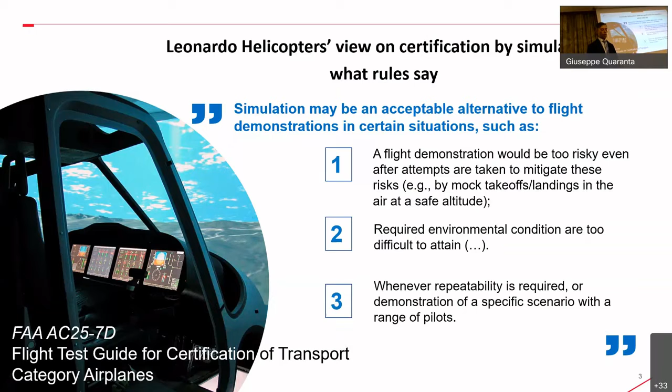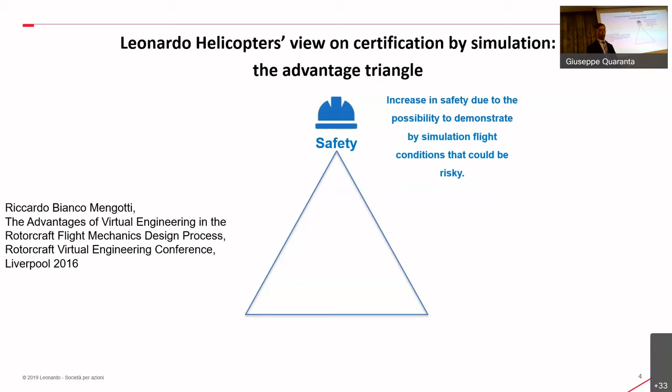From a company point of view, we think there are three main advantages of simulation, which I'll present through this graphical representation, the advantage triangle, first presented at an engineering conference we had in Liverpool. In that paper, the first advantage is safety, which couples with what's already shown by the rules—we can substitute some risky scenarios with simulation.

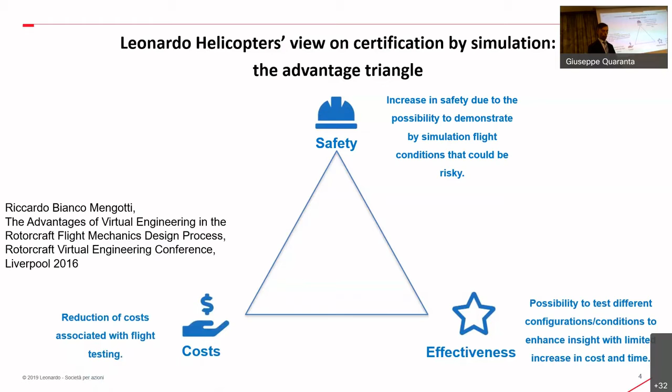The second advantage is effectiveness, so we can get more understanding of what we're simulating through changing conditions and configurations more than we can do in flight. The third is cost, once the model cost has been taken into account.

For sure, this doesn't come easy. All these benefits have a cost, and the cost is model and simulator development. The literature doesn't provide quantitative limits or ideas on how good the model needs to be.

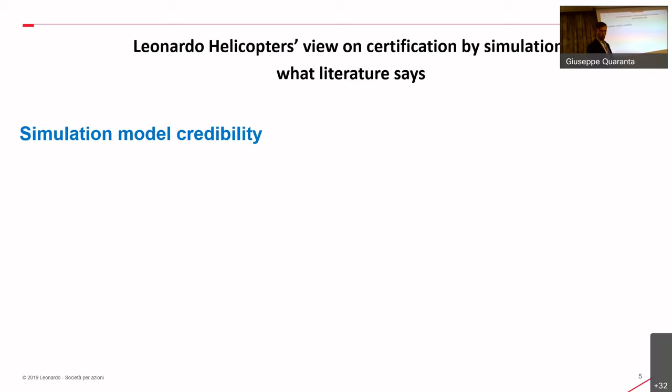So it's more a qualitative description of the model reliability. For example, one particular reference tells us that the model should be at least good enough for me to say I'm comfortable using it, to take a decision and send people to flight with my model. I think it's a good rule, but it's a qualitative one.

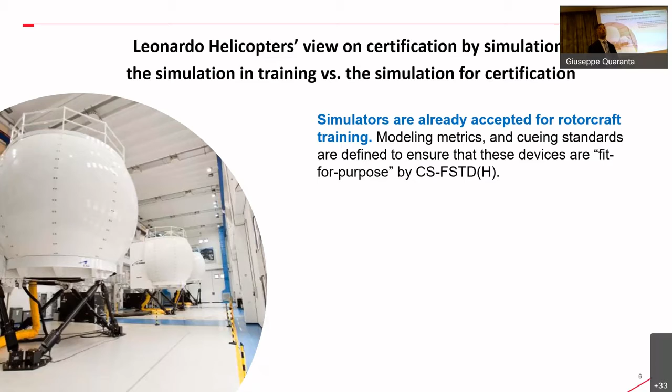We know that simulation is used very much in training. The use is slightly different than a certification model. Typically, training can rely on a set of already-defined rules, the FSTD, that provides specific tests, a specific bunch of tests, and rules that the model should respect—boundaries on which the model should stay to reproduce the flight test data.

But the certification simulator is a bit different because it comes earlier than the training device, and the need for extrapolation capabilities is stronger for the certification simulator. This is because we need to use it especially to extrapolate, to test conditions that have not been tested before and for which we don't have a predefined benchmark provided by flight testing.

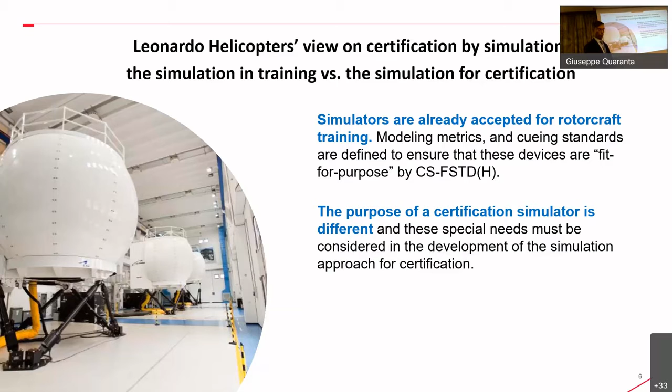Simulation for certification, from our point of view, to be useful—not for training—should give strong importance to physical behavior. So if we want to extrapolate, we should be able to keep the physical meaning of all the parameters that we are even tuning to match the flight test data.

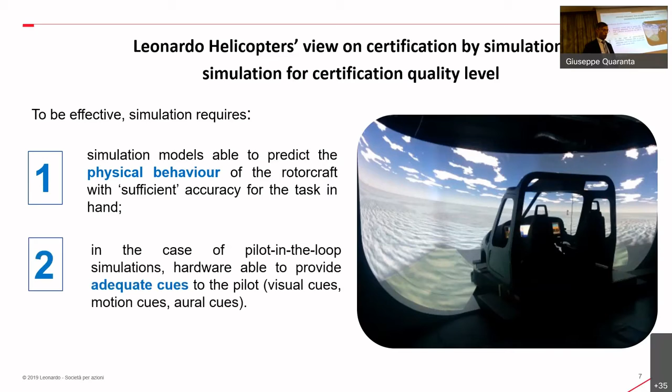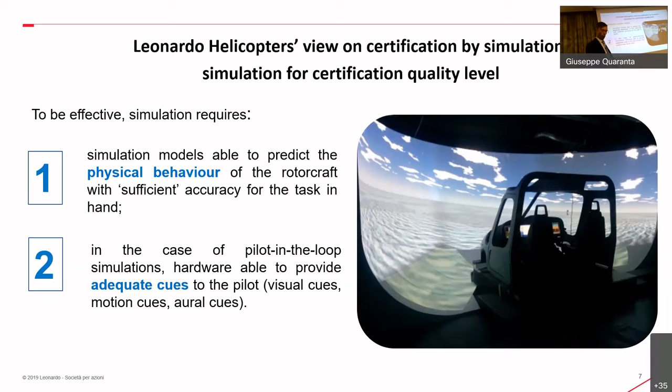Second, if we move to the simulator, we should provide adequate cues to the pilot. From our experience, for example with power-off landing, the model might be good, but the pilot might complain about the feasibility of the maneuver due to lack of cueing from the hardware more than from the reliability of the model or the model quality.

Our challenging view is to try to cut down current certification flights, or flights used to support certification, by half in 10 years.

Moving to the second section, our experience so far. I'll present two examples. One is the power-off landing of the 189, in which the means of compliance was simulation. This is basically a full example of certification by simulation, in which flight testing was used to support simulation. The other one I will explain the details of later.

Civil aircraft have a requirement to land safely even if two engines have a failure. The paragraphs explaining these requirements are those listed here: 75 and 79 concern landing after an engine loss, while 143 is about controllability in landing.

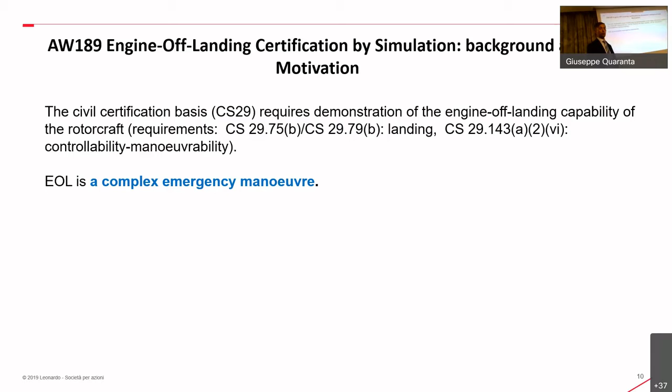Then, close to the ground at a certain height, about 200 feet, the pilot performs a cyclic flare by pulling cyclic, gaining angle of attack and lift, and reducing both the vertical and horizontal speed of the helicopter. Then finalize the landing by leveling off and compensating the loss of lift produced by angle of attack by increasing the collective.

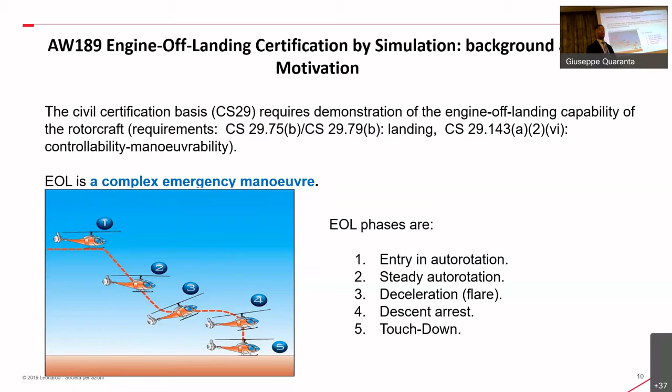And then touchdown. This is a very complex maneuver because the pilots need to quickly, in an emergency situation, assess the distance from the ground and respect the constraints imposed by the flight manual on this maneuver.

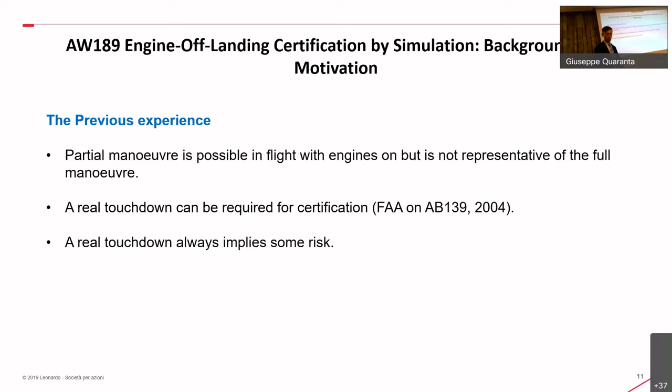In previous experience, we typically performed a partial validation in flight through just the cyclic flare. With the 139, we were asked by the American certification agency to perform a real touchdown. We did that on the 139, but a real touchdown always carries some risk. So in 2014, with the 189, we decided to go with a simulated maneuver, with support from the European certification agency.

I'll give a brief introduction to the helicopter we used for this activity: the 8 to 9 ton helicopter, the 189, used for offshore scenarios, VIP transport, and search and rescue.

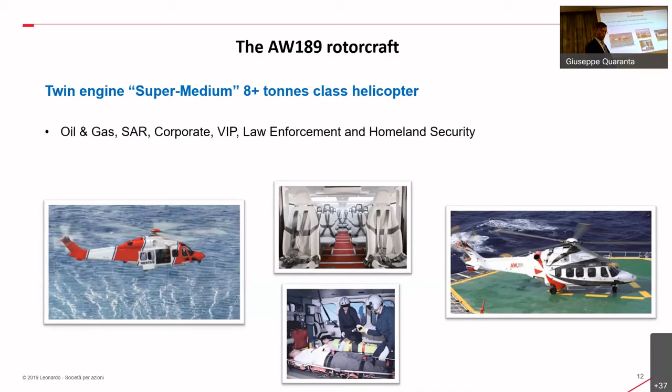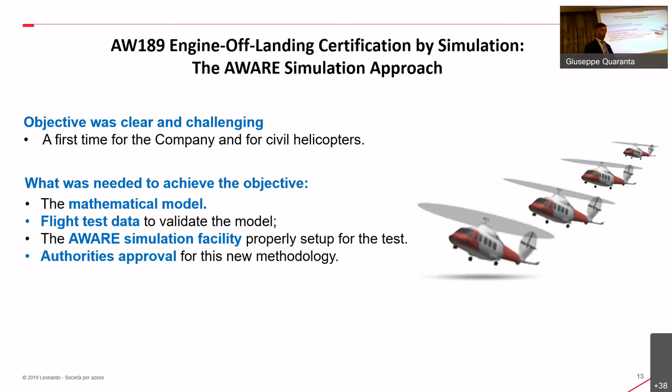I'll go into some details on the simulation approach we used. It was the first time for us to perform this kind of maneuver. What we needed was the simulator facility, the mathematical model compared against flight data, at least for the portion where flight data were available, and the green light from the certification authority.

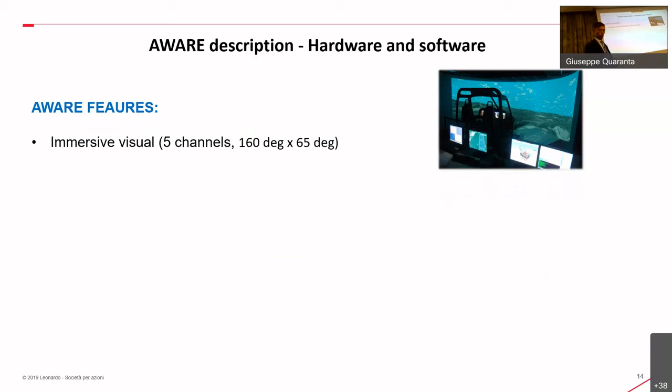We performed this in our fixed base simulator, shown in the picture on the right. It features a 139 cabin and emulated displays. The portions that can be tuned or changed according to the aircraft we want to represent are basically the model and the displays: a Simulink model for the FCS and a FLIGHTLAB model for the aircraft characteristics.

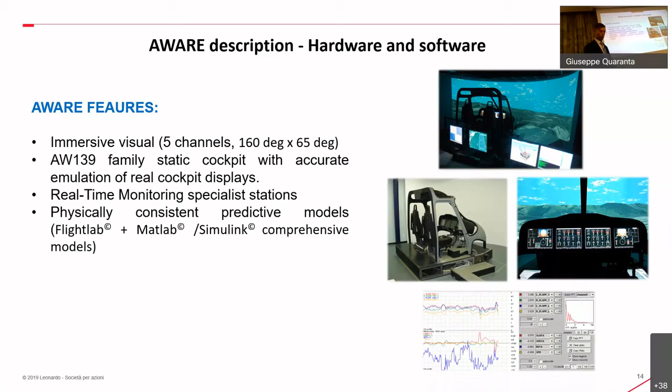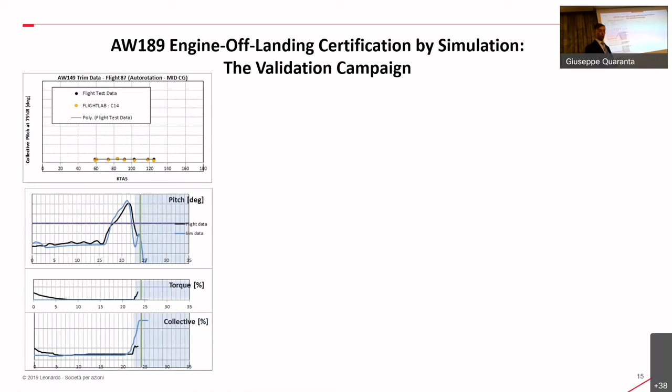To provide input to the simulation, we performed some flight activities. Partially the maneuver was performed in flight: the cyclic flare with one engine idle was done in flight. But the cyclic flare is not representative for the portion where the pilot pulls the collective, because the engine comes in to provide power. So that last portion cannot be reproduced in flight, and that was done in simulation.

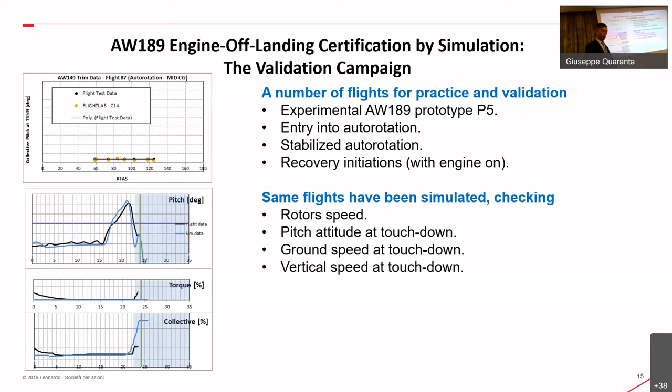The main comment was that, as I told before, not only the model needs to be taken care of, but also the simulator. The pilot perceived a higher workload and difficulty in perceiving the ground altitude, the offset from the ground, which made it more difficult for him to optimize and time correctly the pull of the collective and the moment to perform the flare. That's why I put emphasis on the hardware that provides the cues to the pilot, because sometimes lack of cueing is perceived as a lack in modeling, but the pilot sees the overall result and cannot split the two.

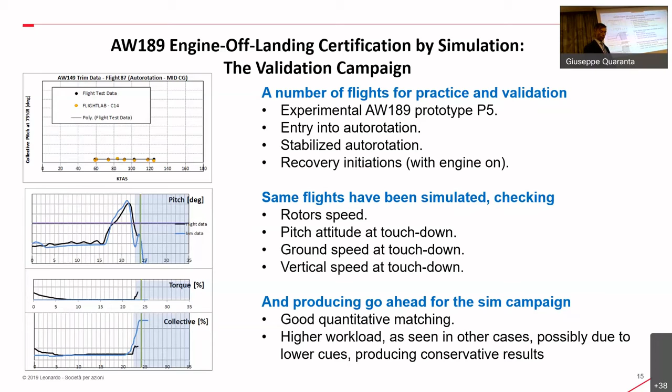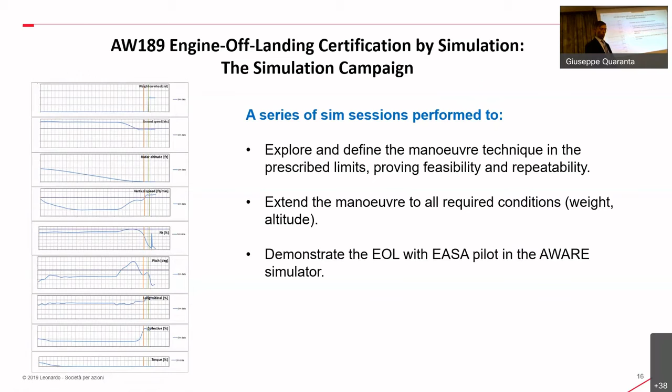With that model, and after the okay from EASA who came to test the performance of the model in our simulator, we performed the maneuver in the simulator, and prepared the flight test manual section using the results coming from the simulator test campaign and the experience of the flight test department.

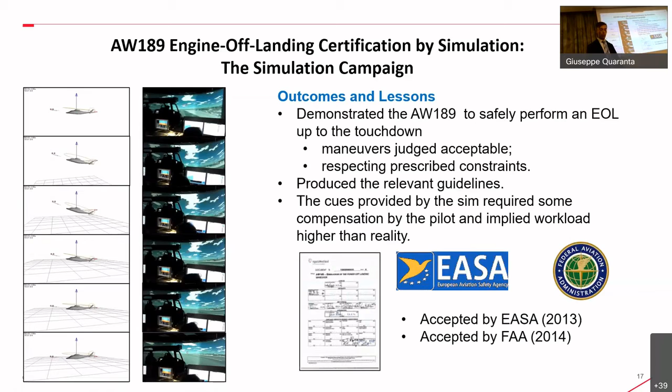The approach was this time accepted also by FAA, with respect to what was requested for the 139 back in 2004. We were not asked to perform a real touchdown this time.

Going to the second example, as I was explaining before, the first one was a true certification by simulation, so the means of compliance was totally simulation with support from flight test to provide validation data. The example I'm presenting now is the other way around.

This is a Cat A simulation in which certification compliance is still done through flight testing, but simulation in this example provided help to reduce the flight testing and to give the crew confidence in their on-field performance of the tests.

So what is a Cat A? At least this is the definition coming from the AIR-OPS, a document that explains the minimum safety requirements and procedures to fulfill those requirements for transport aircraft. Cat A means an aircraft that is certified, meaning it can land or fly away safely after one engine failure. The example I talked about before was a two-engine failure; this is the single engine failure for a double engine helicopter.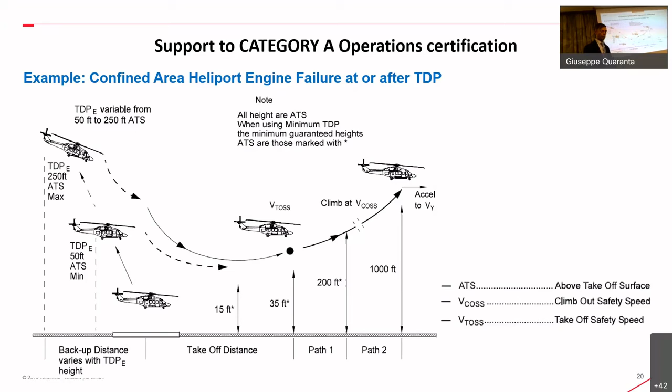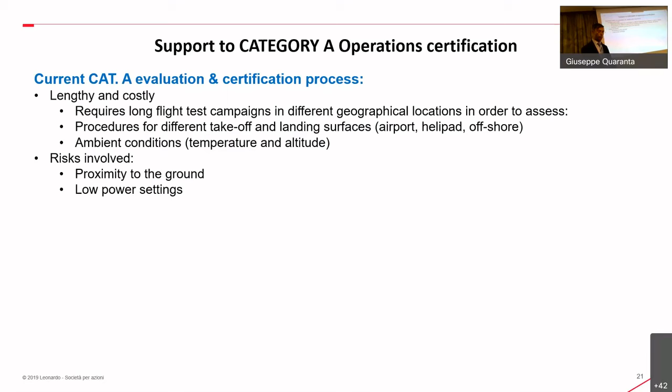All these maneuvers are typically described in the flight manual through charts, function of weight and ambient conditions. So the amount of flight testing behind a certification of this kind is big, especially because you have to move to different areas of the world in order to get the correct ambient conditions. Also, the rehearsal is performed in flight if the flight test department is not provided with a good and reliable predefined performance of the rotorcraft. So the idea for this particular certification of the last engine we put on the 189 was to give more support to the certification process through simulation, in order to reduce cost, time, and risk of performing the flight test activity.

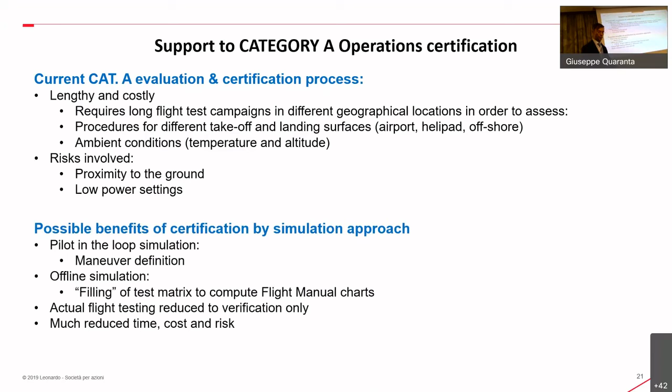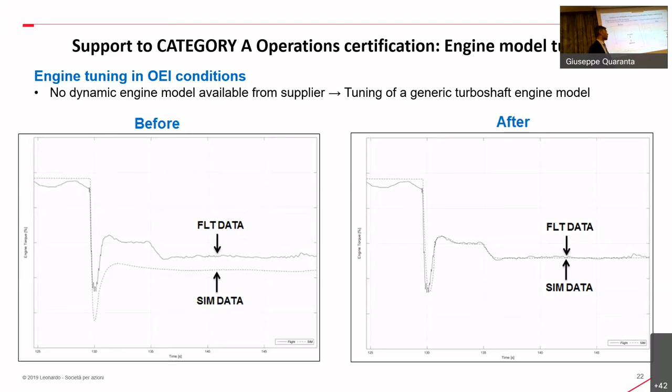Another section that's for sure important is the low speed interference. All these maneuvers happen at low speed and are given to the pilot in terms of speed and pitch attitude in the flight manual. So both need to be captured correctly, and wake interference on the tailplane plays a major part in matching both the speed and the pitch attitude.

After the tuning, we were happy with the matching. The picture shows the parameters that are important for this particular maneuver: pitch attitude in the middle, vertical speed. After the failure, there is a loss of altitude, an increase of vertical speed, and then fly away. Also, ground speed is important because the pilot needs to track both the pitch attitude and the ground speed in this condition to perform the maneuver properly as it is certified.

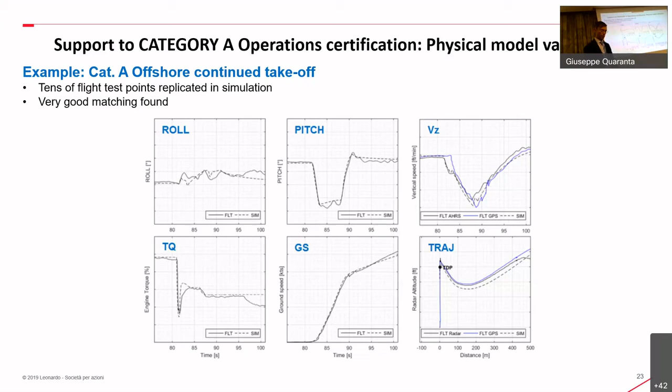So we used the model. We provided the crew charts to reduce flight testing when they went on field to perform the flight. For example, here we see one example of the charts we provided. So the height loss is the major parameter that is important in this maneuver, after the engine failure, as a function of gross weight and ambient conditions.

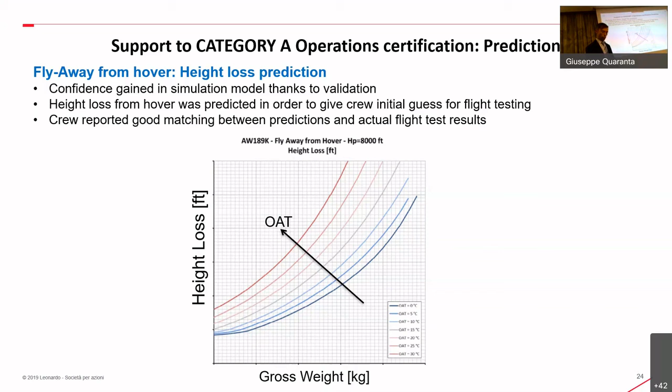Again, the idea is to define a maneuver in which we can increase as much as possible the gross weight for which we can certify the aircraft, and also cover as much as possible the ambient conditions that we want, where we ask certification from the certification agency for that maneuver.

So these are the two examples that I wanted to discuss in more detail. Then we had some other activities, for example, rehearsal of this kind of maneuvers in scenarios that are difficult to attain.

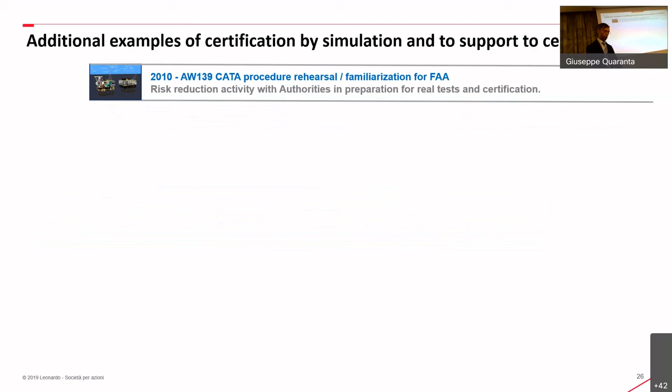We did that, so rehearsal of the category A maneuver for offshore landing, landing on the offshore platform for the 139, but also for the 189, same scenario. And then also the power off landing was performed for other aircraft, the 139.

169. For the 169, we got the okay also to include demonstrating by simulation the quick load release. So to extend the test we performed in flight with a single drop of an external load, we extended it to various conditions by simulation.

Again, the power off landing certification for the Trekker and for the Koala at high altitude, and again offshore scenarios for the 189 for safe ditching simulations, which for sure is not a scenario that we can test through complete flight testing.

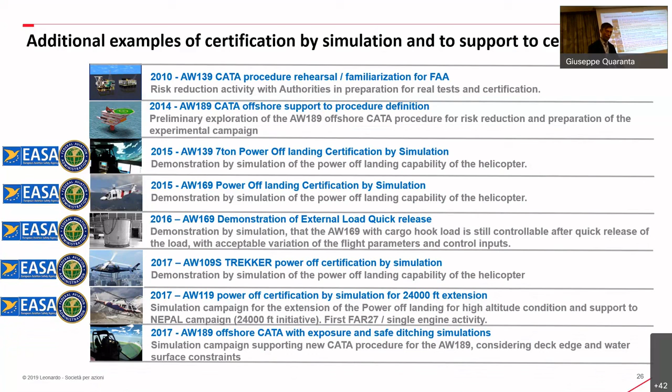I have explained our view and our experience so far. The first step we took to try to get that challenging target of reducing so much the flight test activity in 10 years was to get the opportunity to launch the RoCS project, certification by simulation, in the environment of the joint undertaking for fast rotorcraft.

So we launched this project called RoCS, Rotorcraft Certification by Simulation. It covers not only tilt rotors or fast rotorcraft in general, but also helicopters. I won't go into details because some of the presentations that follow this one will give more details on the RoCS project.

But basically, the target is to expand on what we did for certification by simulation so far. The examples I presented are basically customized, so there are no general rules that we follow. It's basically validation and acceptance from the certification authority case by case. So the idea was to launch this project to try to make a first step toward standardizing the application of simulation in future certification in Europe.

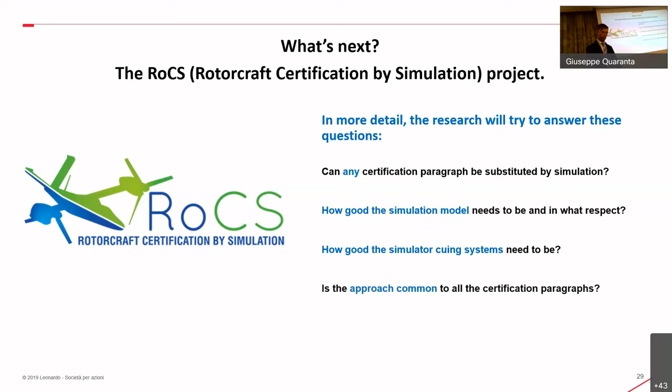This was my last slide. If you have any questions.